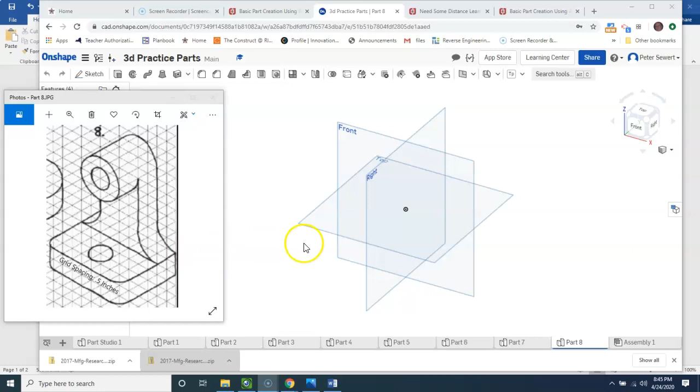So I'm going to start with drawing the base, and I'm going to do that on this top surface right here. I'm going to hit Sketch and let it put my sketch plane on. The software's been off for a little bit. I haven't been working with it for an hour, so I might have to log back in. Let's see, if this goes too long, I'll just pause this.

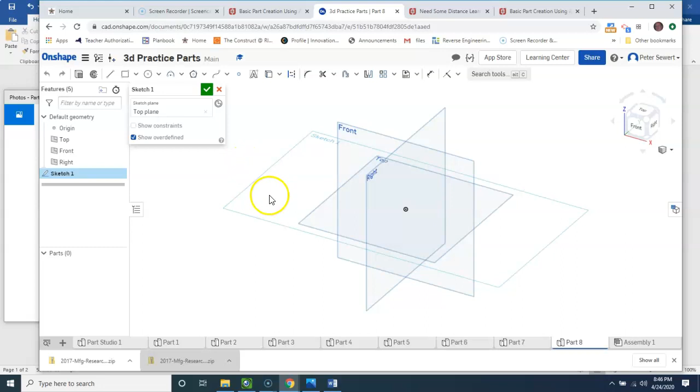Okay, so it did take a little while to come up. So I'm going to start my sketch plane right there on that top surface. I'm going to right click and say View Normal To. And this is going to be a rectangle here.

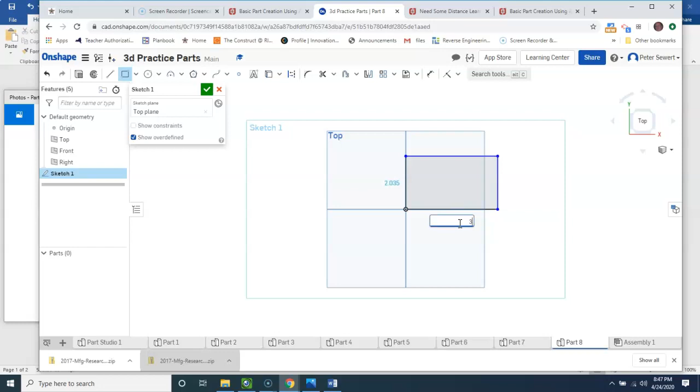So I'm going to start my rectangle tool, just like I always do, seems like. Let's see, I'm going to get this. The base here is 3 inches by 4. So I'm going to start with here. I'm going to make that the 3, and then the other one the 4.

And if I green check mark this and right click and isometric, what do I end up with? Let's turn that one off and that one off and that one.

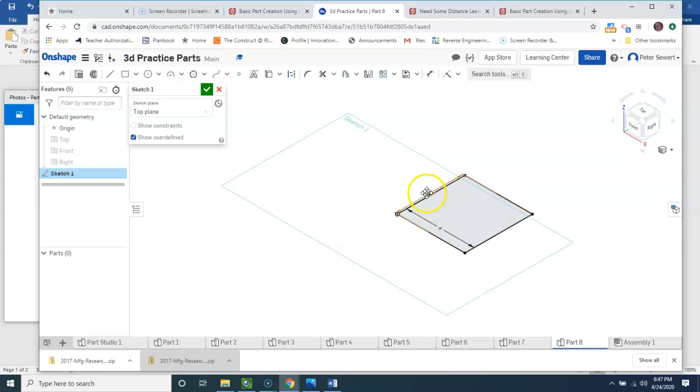And actually I want it to be the other way. So I'm just going to double click on the sketch here. I'm going to change this one to 4, and this guy here to 3. Okay, and green check mark. Alright, that's the way I want that to go.

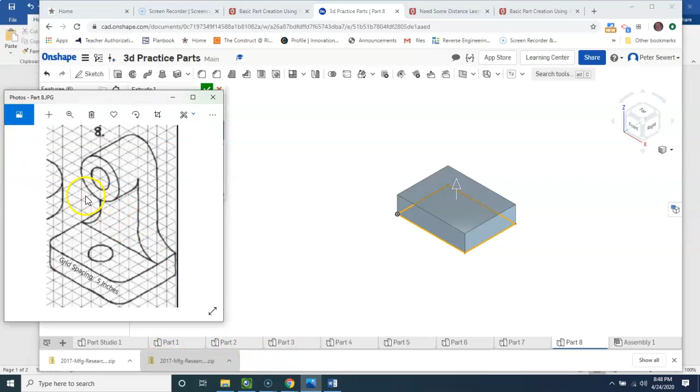Now, I'm going to extrude this up, and I'm going to come up the full thickness of the thing, and the full thickness is this distance right here, which is 1 inch. So I've got 1 inch, green check mark.

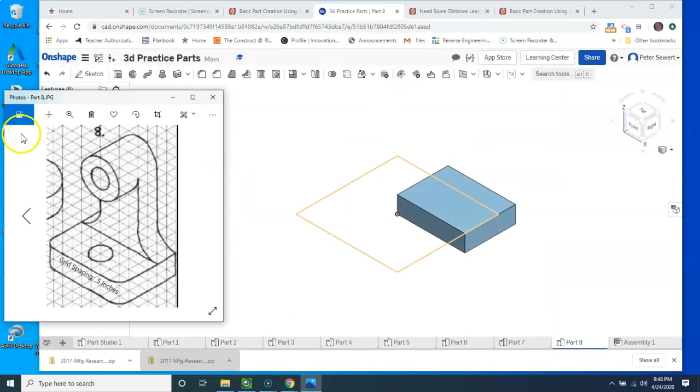Okay, now the front corner of this, I'm going to close that out. I don't have to save that. The front corner of this, the 2 front corners, have a fillet on them. So I'm going to use my fillet tool, and the radius is a 1/2 inch, so 0.5. And I'm going to click on that line there, and I can just barely catch that line there. Green check mark, and that sets up the beginning of our part.

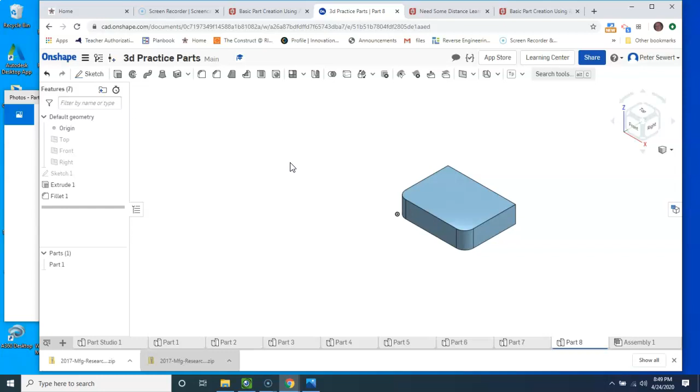Now, a couple of things to do first. The first thing I can do is I can put the hole in the base. So I'm going to sketch, I'm going to click on that. When I say the hole in the base, I mean this guy right here. It's a diameter of 1. So I can right click, say View Normal To.

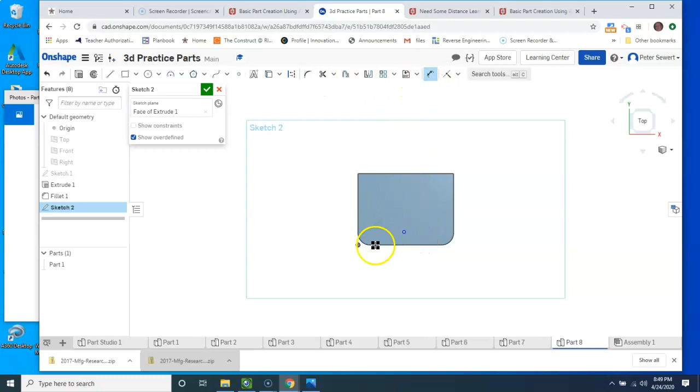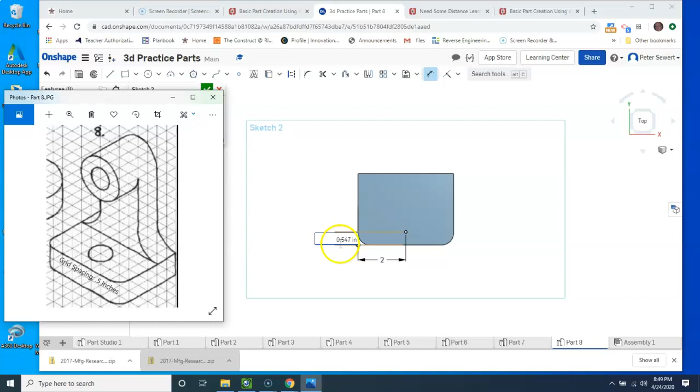I'm going to use my hole tool, so I'm going to put in the point, dimension from there to there, and that's going to be halfway. So the thing is 2 inches, and then from here to here, and that is back. How far is that back? Half. That's back 1. So over here on this, I should type 1. Okay, that locates my hole.

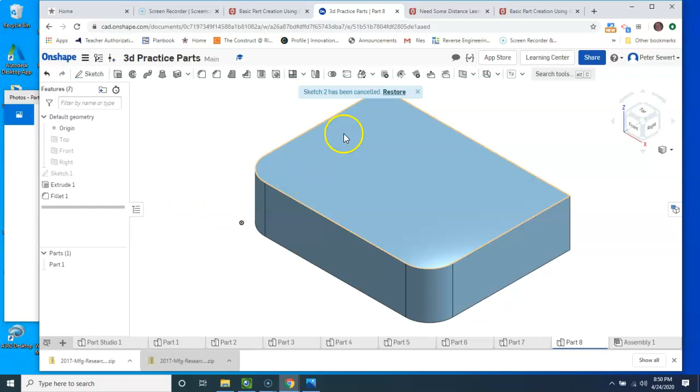Right click. Uh-oh, I think I goofed that up. What did I do? I'm going to restore that. There we go, I somehow made a mistake there. Did you see that there was a message right across here that said restore? So I restored my sketch.

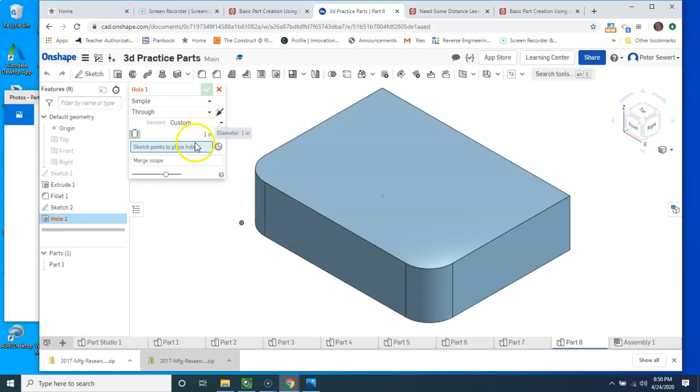Okay, hole tool right there. And this is going to be a simple hole. It's going to go through, and the diameter is going to be 1 inch. So I'm going to select this hole, the sketch point to make the hole on, and green check mark. Okay, so we're getting there.

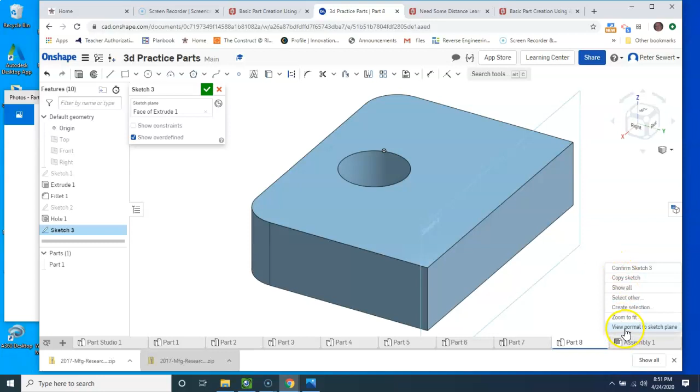Now we got to start to build this tower thing, and this is going to be a little bit of an experiment because I'm not sure exactly what I want to do to create this, but I do know that I am going to put a sketch on this back surface and right click and say View Normal To. And I'm going to zoom out a little bit here for this because this thing is tall.

So the first thing I'm going to do is I'm going to start with my rectangle. I'm going to come up this way, and there's been some, I've had to really look at this, and this is the length of this, the height of this, I think is 3.5 inches.

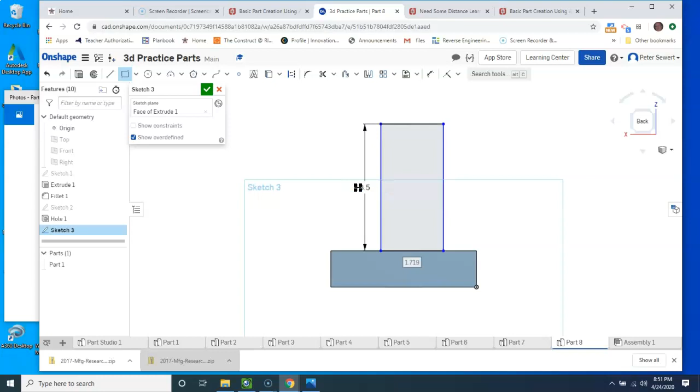And then the width, I do know, the width is 2 inches. And the distance from this edge here to this one over here is going to be 1 inch. And then what I'm going to do is go to the top.

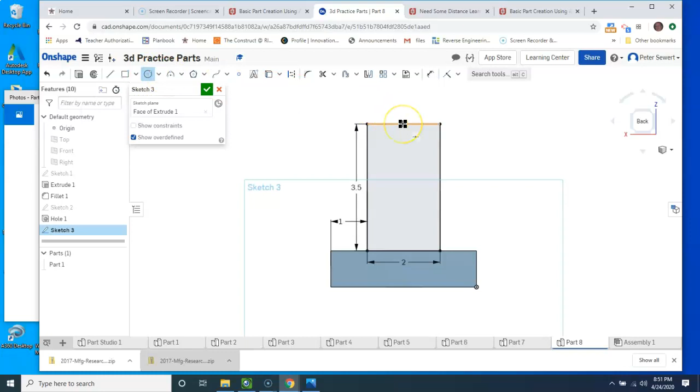Okay, and I'm going to put a circle on here. It comes out like this. And then I'm going to check mark this because I think I'm done. And then I'll right click and say isometric, and this all gets pulled forwards.

A total of, let's see, it's going to come forwards—I believe it comes forwards 2 inches. Well, we'll do 2, so I'm going to extrude this. Oh no, it's going to come forwards 1 inch.

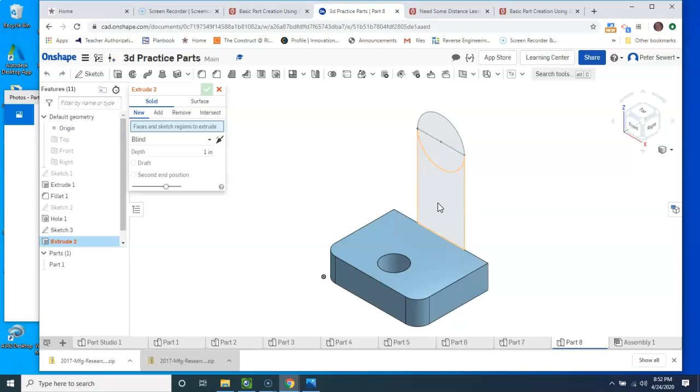So I need one more hole in here too in the sketch. I'm going to re-edit the sketch, right click, and view normal too. Okay, I'm going to put one more hole in here. That's this hole right here in the middle, and that is a diameter of 1.

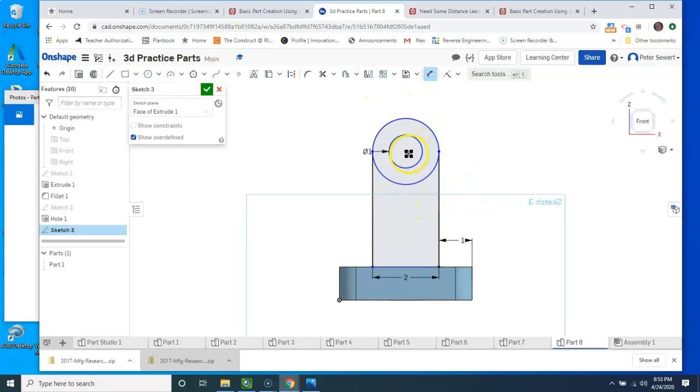Now I think what I really want to do is delete that line out. And I'll have to put in a dimension again for this, going from here to here. Okay, yeah, there we go. Alright, so green check mark.

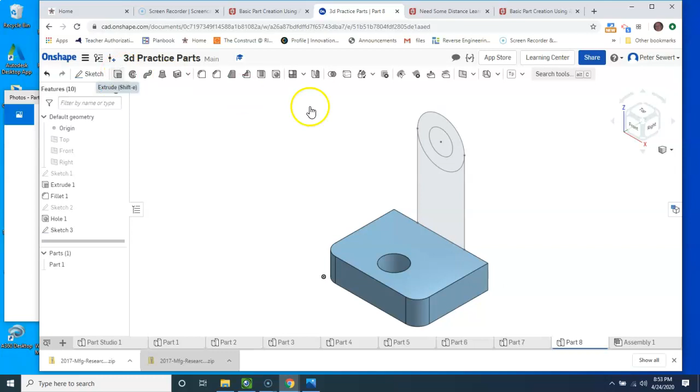Right click, isometric. Now I'm going to pull all of these two things out 1 inch. So extrude this and this, and I'm going to flip the direction that it's going, and come out 1 inch.

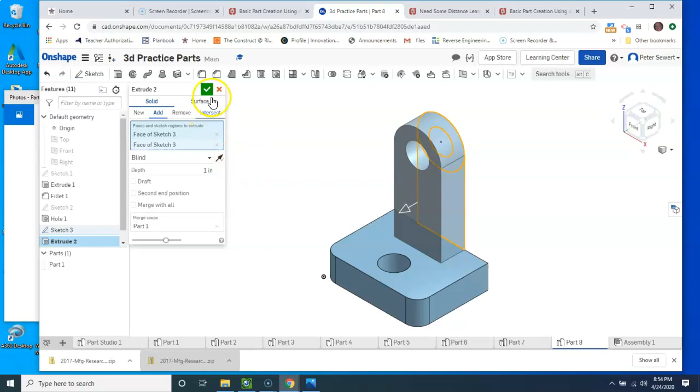Okay, now I forgot something there, so I've got to edit this part. I forgot that I needed to click where it said the word 'add.' Did you see how when I just had this on, it's a different color? That makes this piece a different piece than this, and I want these two things to be the same, so I have to hit add. And then when I green check mark this, now that is one continuous piece.

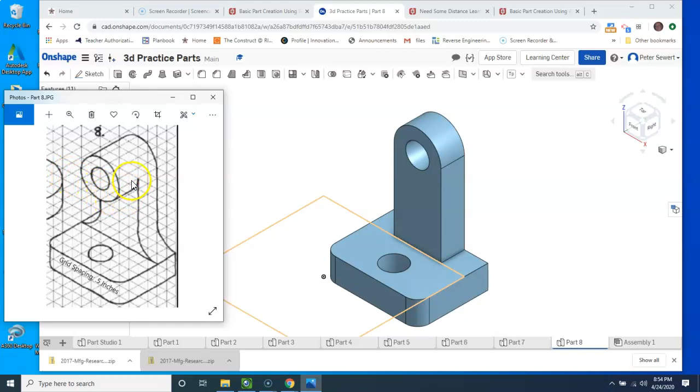Okay, so now what I've done is I've created this post to this edge right here, to this face. Now what I'm going to do is put a sketch on this face, and then redraw those two circles and extrude those out. So my sketch plane is going to go right on this surface.

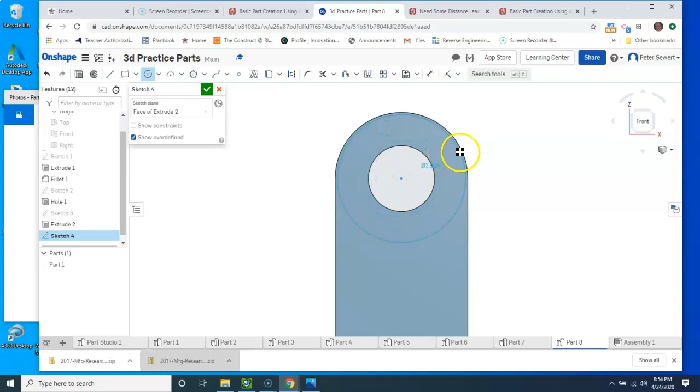I'm going to, just for normalcy's sake I guess, extrude that. So I'm going to go from the center here, and you see the little square—that means I'm right on the center of this thing. And, well, you know what, I'm going to do something here too.

I'm going to get out what's called the Use tool, and that's this guy right here. Use allows me to take existing geometry like that and actually have them on my sketch. So...

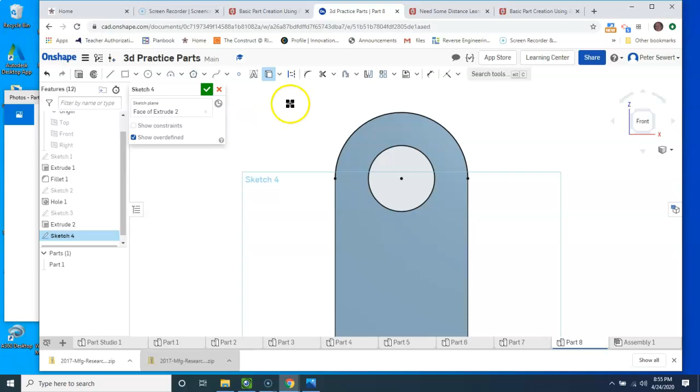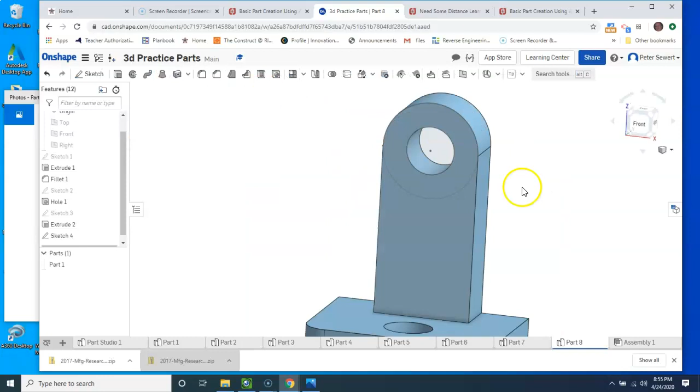Circle, I come from right here out to here, and now I'm going to right click and—oops, I'll hit the green check mark first. Okay, right click and say isometric, and I'm going to extrude that out, and that's going to come out another inch. So there is our part.

Now I've got a couple more things to do, and one of them is I need to put a fillet on this line right here, and the same one on the opposite side. So the fillet is going to be, I think it needs to be 1 inch. So I'm going to do a fillet of 1 inch.

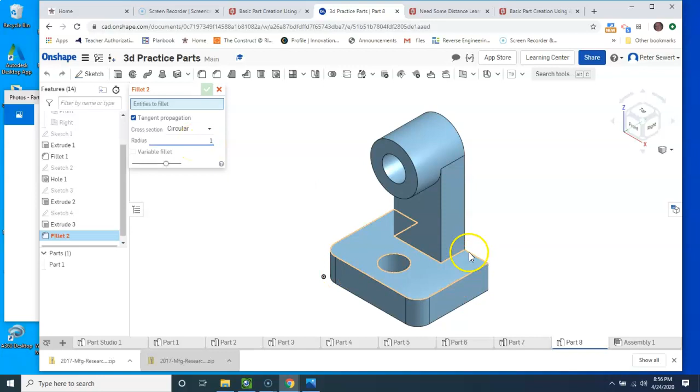And I'm going to click on that line. Yep, that looks pretty good. I'll spin this around, and I think that looks pretty good too. Green check mark. And then let's go and look at this isometrically. What do you think? I think it looks pretty good, actually. That looks pretty good—so that's the part.

So you need to do—this is number 8. There you go.